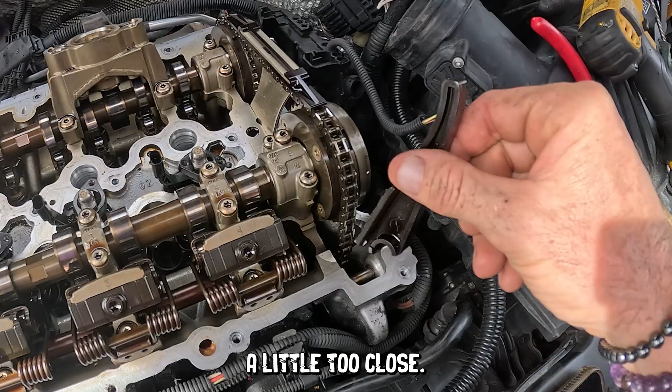We are back on the Mini. The Mini had so many problems, so many oil leaks. We did the valve cover. It had pushed out too much oil out of the other seals and they just kept leaking. So the best thing to do at this point is to pull the engine out, fix everything right, get it in there, get it ready for another 60,000 miles, because that's about what this has on it.

Then we're just gonna scoot the motor out, take it all apart, put all the new seals on it, put it back in, get it down the road. Stick around, let's get on it.

Oh yeah, Rev's here.

All right, first thing is take the headlights out, pop those guys out. Then we'll be taking off some of the fender liner stuff, bolts like that. I think those little clips just pop right off. There's some bolts underneath, and this whole front end with the radiator, everything else pops right off. So in the meantime, we're gonna be draining the coolant, stuff like that.

The AC, we're gonna hang the condenser and stuff maybe off the side so we don't have to disconnect that. I think we can scoot around it. I think I can push it out of the way and we should be good with that. But go ahead and we'll get into the time lapse and you'll see me yank this thing apart.

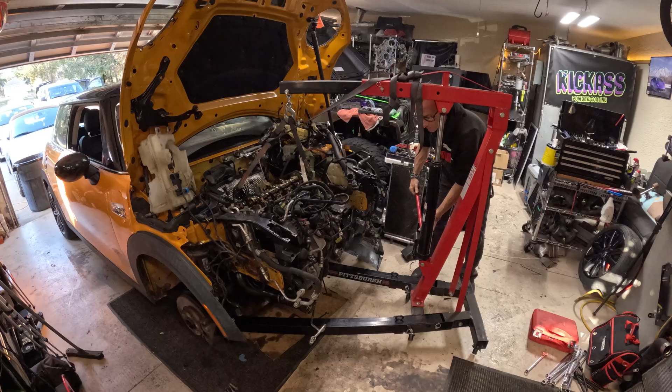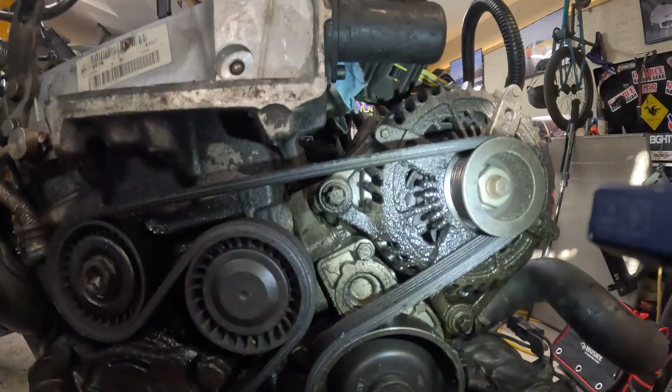All right, we've got the engine out and 64,500 something miles. Remember that. Look at all of this oil. It's supposed to be inside the engine. It's everywhere, but look at that. All over the drive belt, all over the alternator. Look at that. I mean, it's everywhere. Puddled up everywhere. Every seal is leaking.

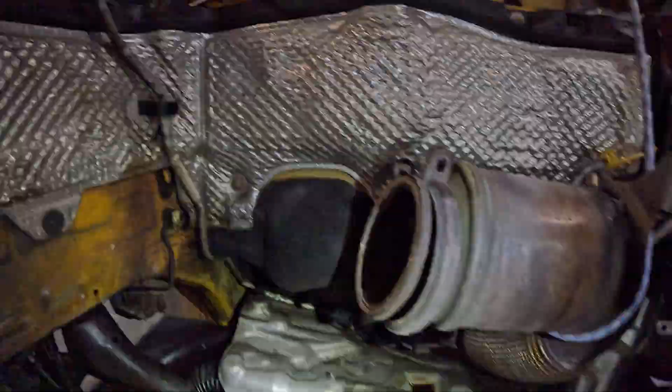That's what these things do. They just blow out every seal. Look at that. Look at all that. I mean, it was puddling up on top of the transmission. Look at that. We're gonna start yanking this thing apart, get it all cleaned up so it looks like a brand new motor when it goes back in.

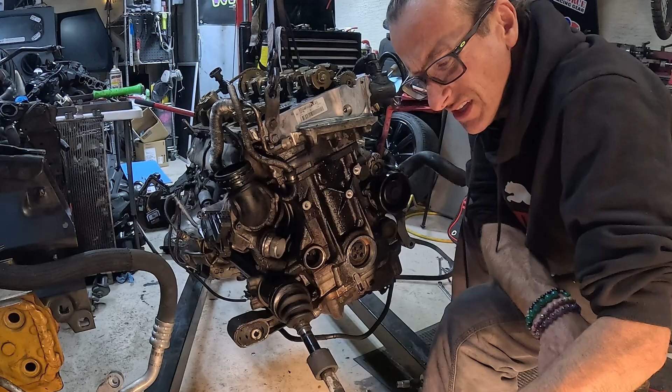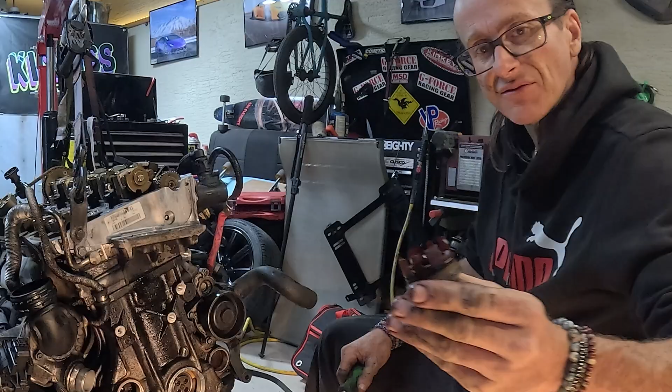Aw, I smudged it. Check these things out. It's got little, I don't know what they are. I know it's for the balancer shaft, so I guess they're access holes for the balancer shaft. It's not even an O-ring anymore. It's plastic, petrified. Like I can't even move it. It's so hard. That's not stopping any oil. Geez, what is this? What the hell is that? BMW. Holy sh! I just can't. The amount of oil, it's ridiculous.

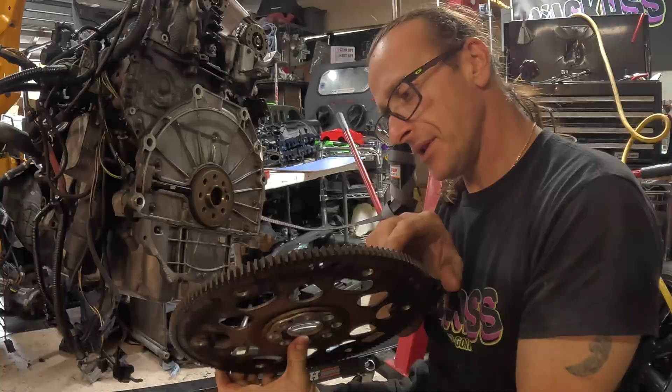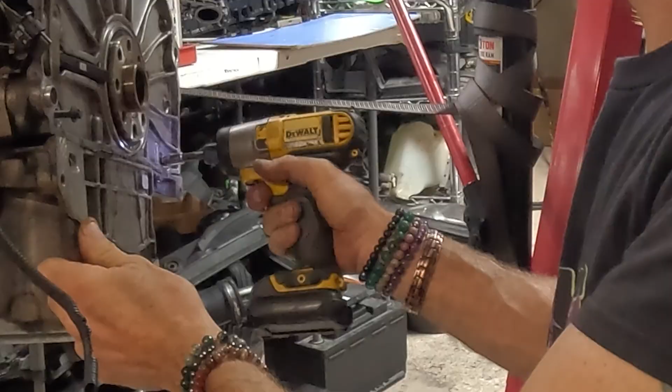Alright, pulling the flywheel off here. Here we go. Hemorrhaging oil. Imagine that. Oh, look at this. Yep, it's all over that thing. You can see where it's slinging all around here. We're going to reseal this oil pan too. We got to pull this cover off because we got to put that other guide in there. Let's get this oil pan off. Oh, alright. What the fuck? Not cooperating.

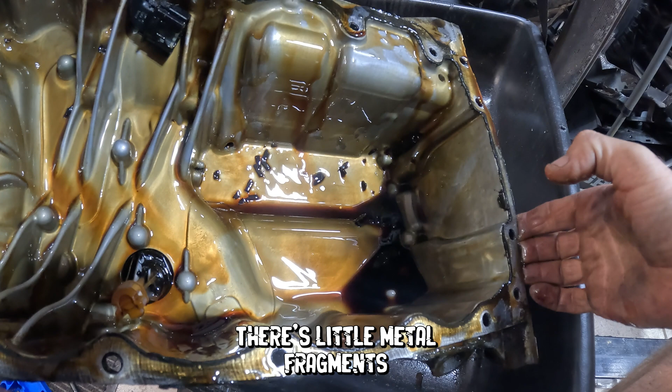Alright, so got the oil pan off. As we can see, there is a bunch of metal pieces, which is kind of sketching me out. It's like I'm panning for gold. Yeah. There's little metal fragments in the bottom. I don't know what that's from. That's not good. We've got some glitter. Forbidden glitter. Those are big ass chunks of metal.

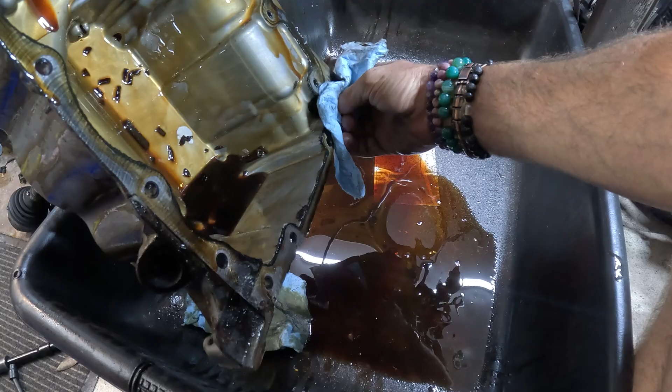Look at all that freaking guide. That thing's just, it shredded it up. You don't want that in your motor. You don't want the forbidden glitter in your motor. It's not fun. It's no good. So we're gonna get all those things. We're gonna put them on a paper towel here, and we'll show you what we find in there.

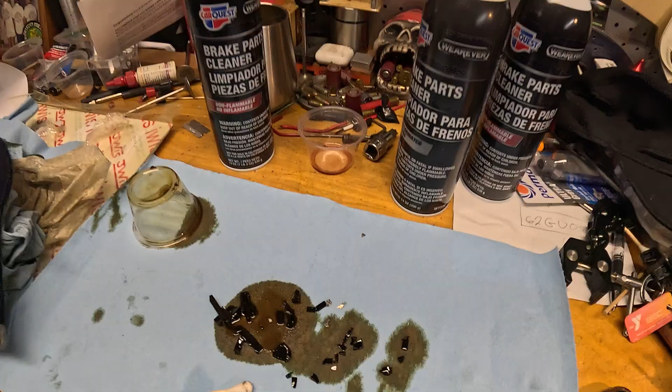And doesn't look that great. We've got a bunch of metal. It's so thin. It looks like bearing material. Oh, you know what that is? No, that definitely looks like it's thin bearing. Not good. Not good. You don't want to find that in your oil pan. Let's see if I can figure out where that's coming from. That's kind of a big deal. I'm gonna go ahead and take this side cover off here that we need to get into the good old chain cover here.

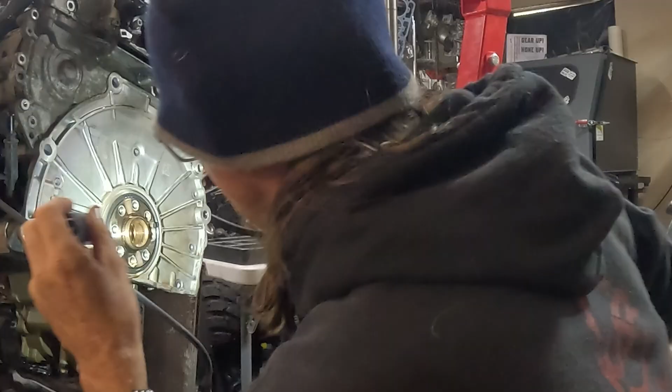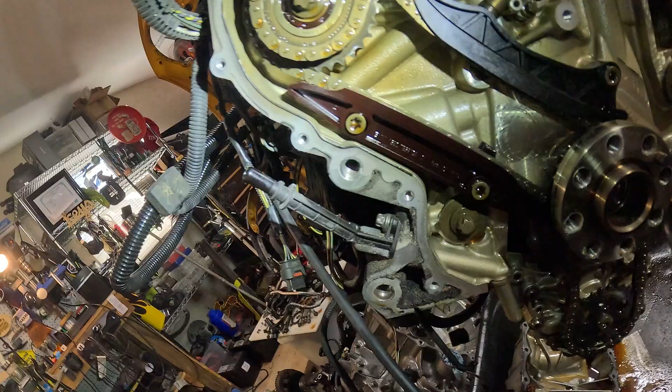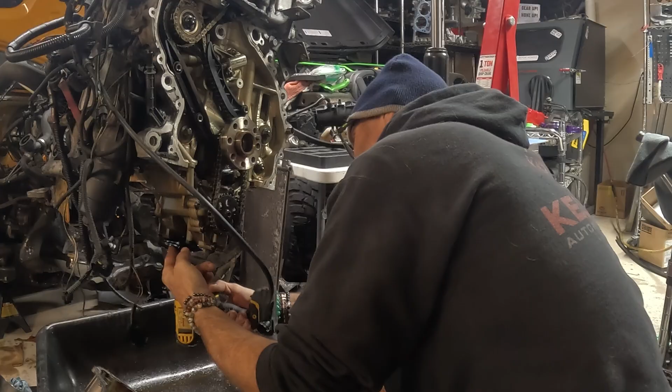Ooh. Oh, look, you can see that one's coming apart right there, too. Well, more parts. What's the name of this game? Order parts, put it together, order more parts, and then more parts. Alright, we're gonna pull this pickup off, remove it. Oh yeah, let's go dump it out over here. That is definitely bearing material. There's tons in it. I'm not putting this back on the car.

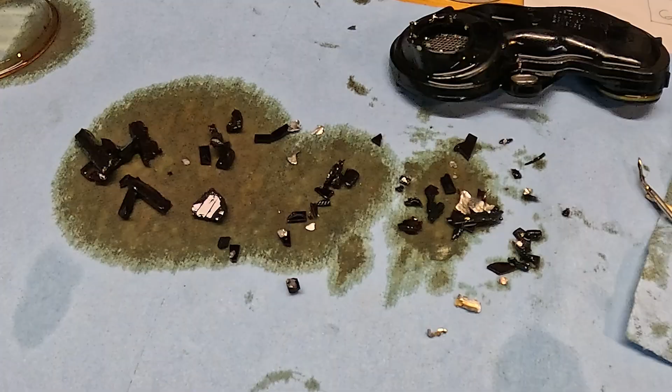That's lovely. We got into this Mini and we found that the rod bearings were done. I found a bunch of chain guide and metal in the oil pan. So pulled the rod bearing and the motor's done. So luckily this lady has an aftermarket extended warranty, which I can honor. So we've got another motor coming.

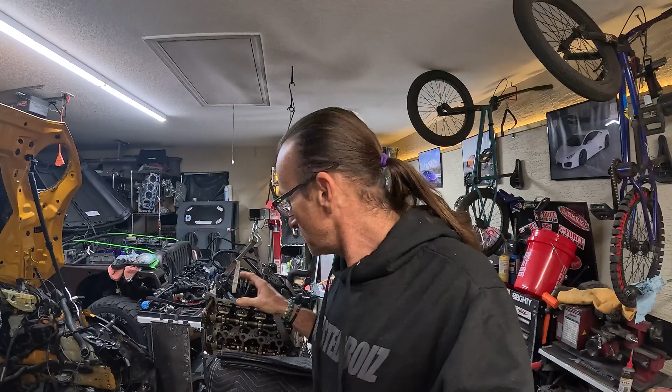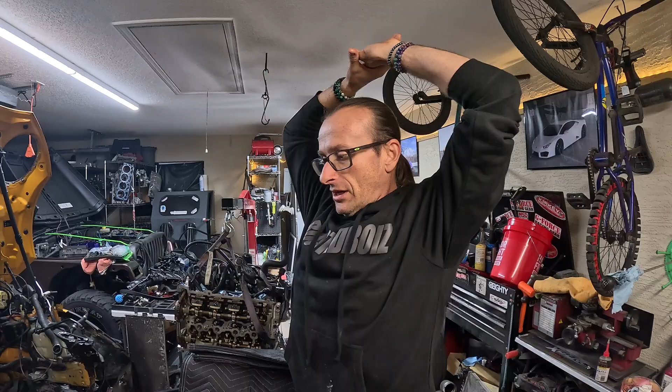These motors are pretty pricey. I think it was like $3,200 for this damn engine. What was it? $3,223. Yeah, not cheap. We got a lower mileage one coming from the junkyard. Should be here in the next day or two. This is the day after Christmas, so I'm sure all the logistics is a nightmare.

So I'm gonna get this cleaned up, get it ready for that other engine when it gets here, so this can be out of the way and I can just put that engine in, rock and roll and slam it in there. We gotta see what it comes with, what we need to swap over from this motor. Because with some junkyards you get all of it, like the wire harness, the computer. Sometimes you just get a bare block with nothing on it and you gotta swap everything over. So hopefully for $3,200 they give me everything. I've never used this company before for engines, so we'll see.

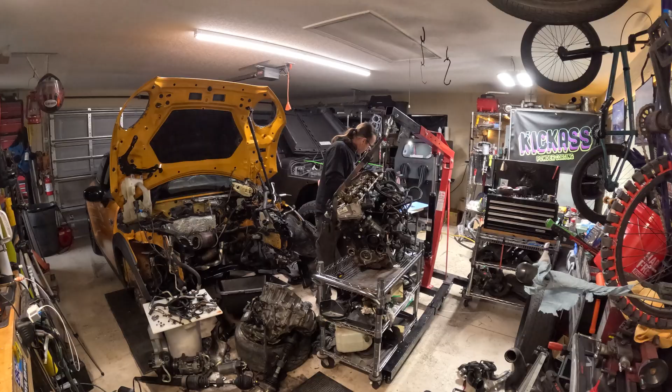But for now, I'm gonna get this oil pan back on here, just snugged up so I can set it on the ground and get it out of my way. I'm gonna start cleaning some of the engine bay in here. It's really nasty. Just oil everywhere. So I'm gonna try to clean all that up while I have this out and I have some dead time waiting on the engine. The motor is getting dropped off today. Should be here shortly. Jax is out there making sure that the guy parks it in the right spot.

What's up? Not often someone greets me with their own pallet jack. It has arrived.

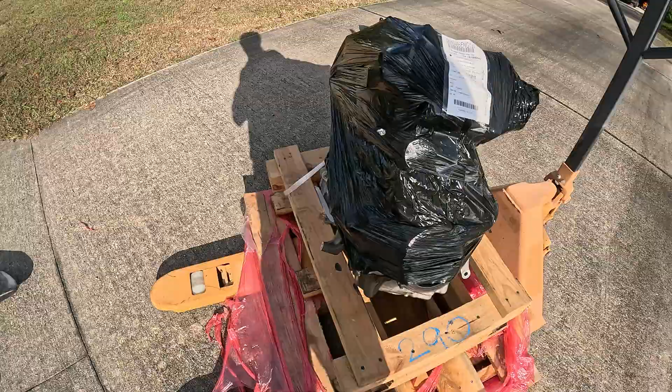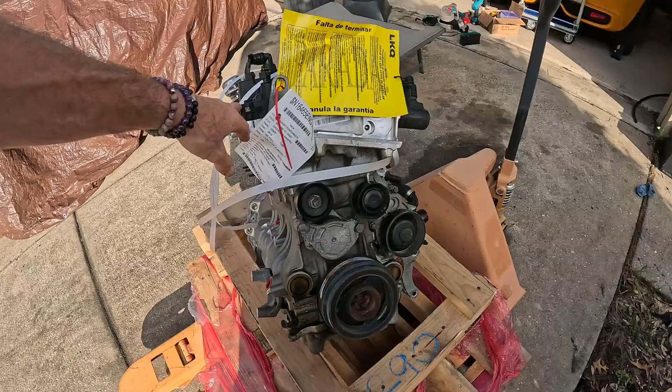Alright, so it's arrived. Do not remove this tag. Remove this tag. Alright. Pretty good. We're in one piece here. Good thing I have these because we're just going to put the new ones on because those are already leaking. Crank seal's leaking, so we'll put that crank seal that we have on there. Good thing I kept a bunch of seals. Good the injectors are still in there, so I don't have to mess with those. And I have to suck all this water out, so obviously it looks like it was outside.

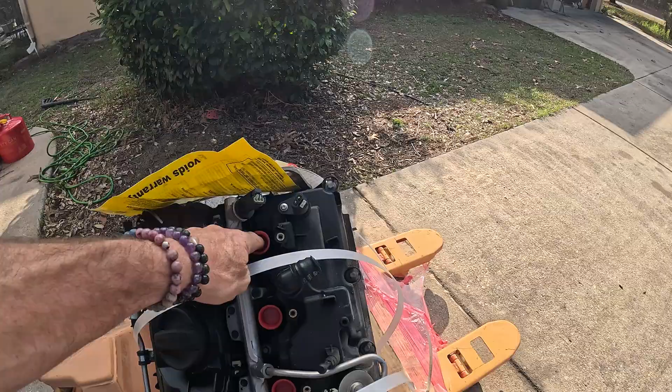So even though it comes from a junkyard and has these plugs, you still want to check everything over really good. We're going to drain the oil, check what's in the oil pan, make sure it's clean, go through all that stuff. Do that real quick. We got our motor. Yay! We can get this car out of the garage. Right now we're going to hit it with some, you know what we're going to hit it with. Spray now.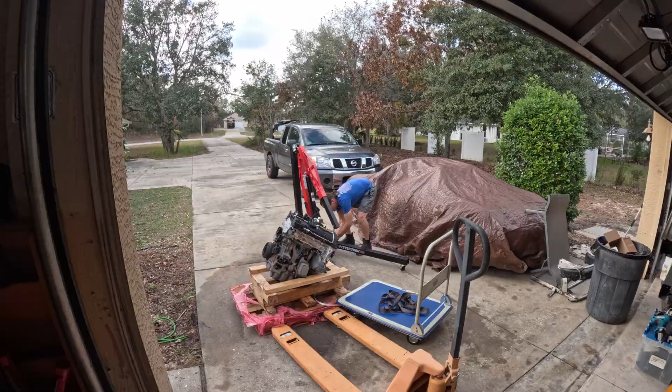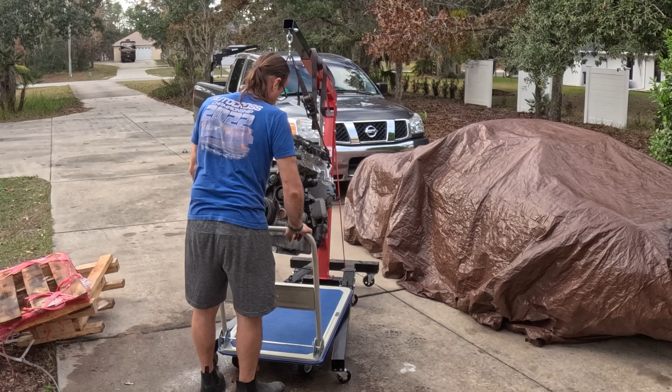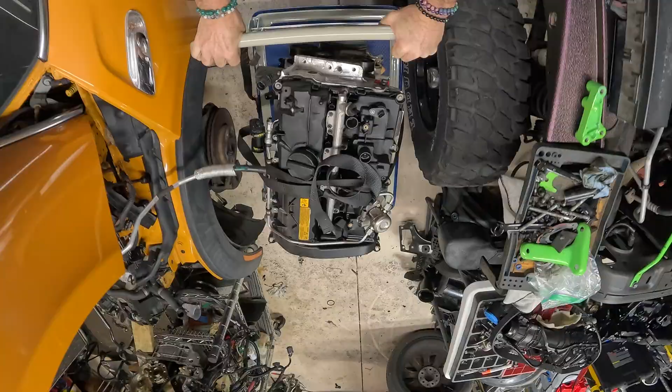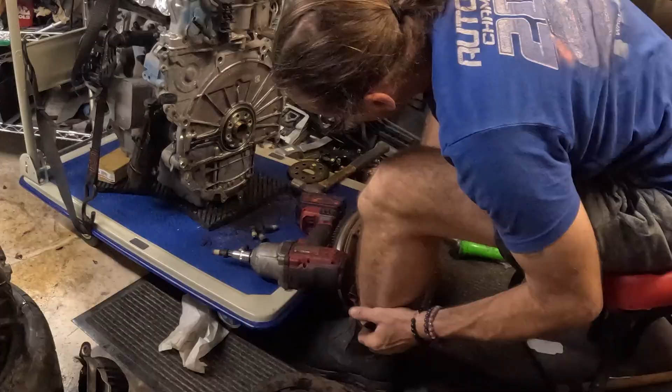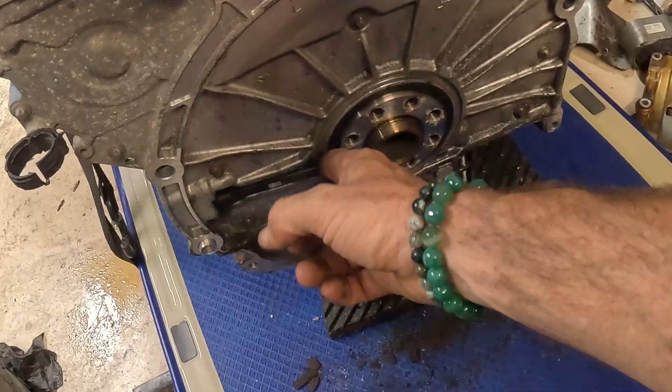So this motor we got came out of a manual, so I had to take the flywheel, pressure plate, clutch, all that jive off. So now we're down to the rear main. It's leaking. Good thing I ordered one. So we're gonna replace this while we have it out here. I suggest if you ever do engines or you get them from the junkyard, just go ahead and replace all the seals. Save yourself some time. If you weigh out the amount of labor to go back and do the seals, it doesn't make any sense not to do them. So we're doing a brand new rear main seal right here.

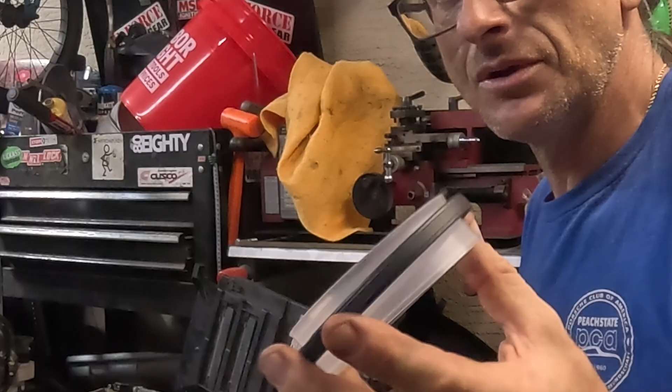Then we're gonna do a brand new crank seal and those two plastic plugs on the outside. We're gonna do those, and I'm gonna do a new valve cover. Then I got gaskets for the oil cooler housing, so all these O-rings on this engine will be brand new. Look at that new rear main seal. Ooh. Pop this son of a gun in after.

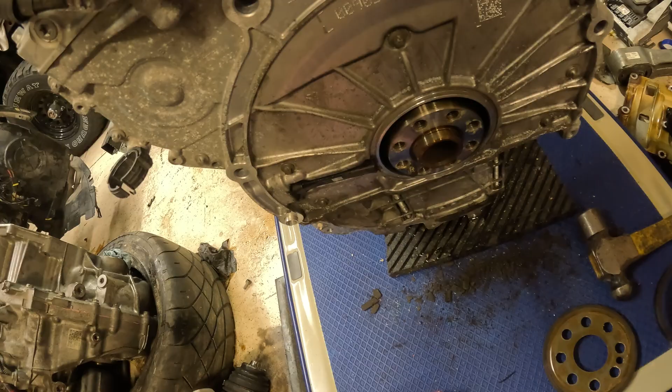You always want to pry away like this from the surface here. What I mean is you don't want to pry from the top of the block that way, because if you scratch the crank, you're in bad trouble. You pry off the crank towards the block, or you can stick a screw in this. Some people put a screw in the seal and then pry the screw out, which works really well.

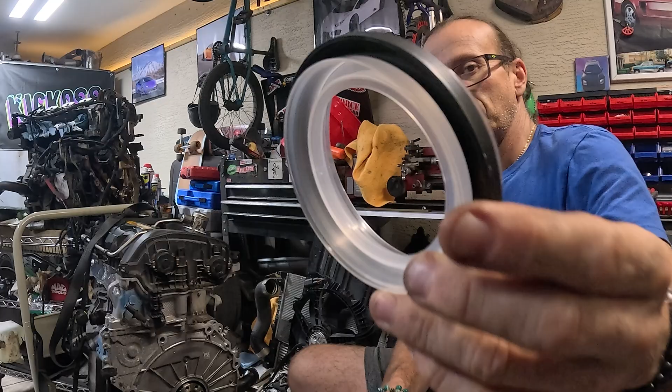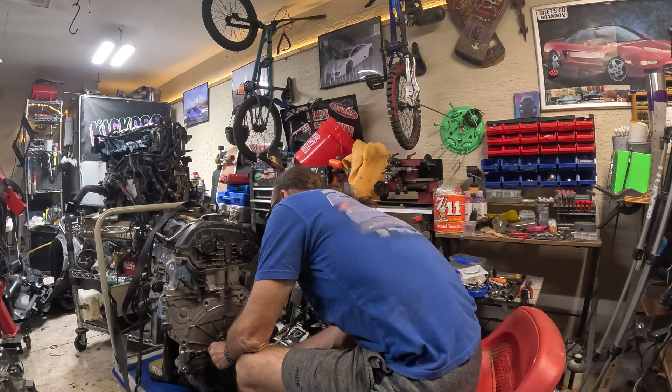So a lot of European manufacturers, a lot of seal manufacturers come with this little tool. Pretty much just stick it onto the crankshaft and slide the new seal on there. Oopsie, does not fit like it's supposed to. Very nice, very nice.

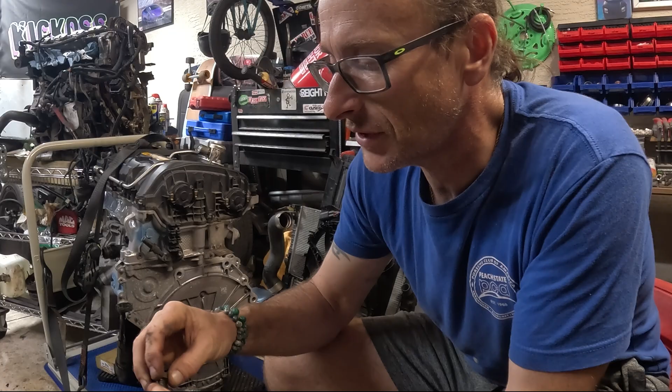Brand new seal installed. It's always a good idea when you have flywheels and all these ones that have all the Loctite, you want to get a die and get it tapped, and tap all that junk out of there so you can put fresh new Loctite in there. Do that with all your holes. Come out in the garage late at night, clean a couple holes, tap that crank. A little oil in there. Oh, son of a biscuit.

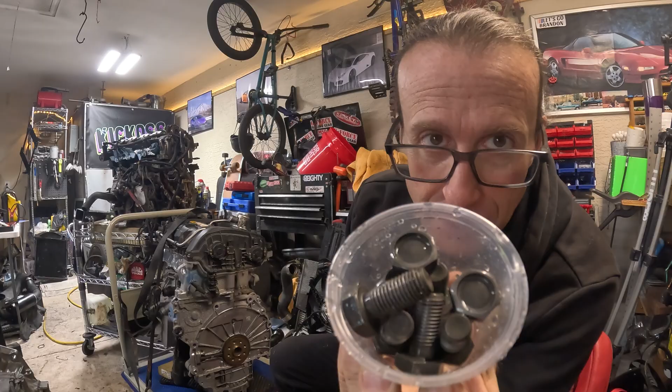All right, it's the next morning. I ran a die around these, and there's still a bunch of Loctite in there. Since I have the vapor hone now, we're gonna do a quick little vapor hone. Get these things cleaned up real quick. If you have little plastic containers like this, I literally hold it in there, stick my nozzle in there, shake it around, and do this kind of deal. And it gets them really good. They're not perfect, but they're way better than they were, and I'm happy. I got clean bolts to Loctite this flywheel on.

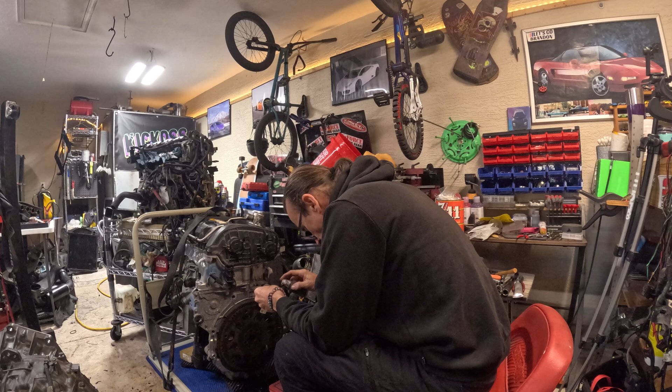We're gonna get into slapping this guy back together. So come along, it's gonna be a little time lapse here. What I'm doing right now is I had just put the seal on last night, so I'm going to put the flywheel on, Loctite those bolts, slap it on. I may slow down and go through those. So occasionally I need torque specs, and I run inside to the computer.

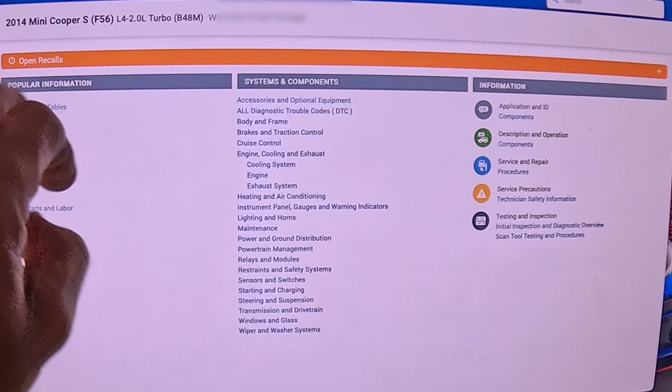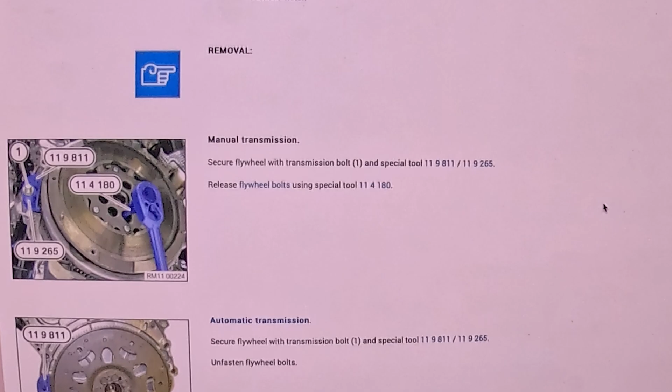Okay, we are here at the computer. You put your VIN number in, and I highly recommend if you're doing any kind of engine work that you don't just Google it. ALLDATA Repair, you get a subscription to this, and it has just about every car. I need torque specification. I'll tell you the thread pitch, the bolt. So it's a 12 by 1.25. And you can go in here, it'll give you step by step on what to do, like how to remove it, all that fun stuff. Then down here we've got our torque specs. 120 Newton meters. You got your labor times too.

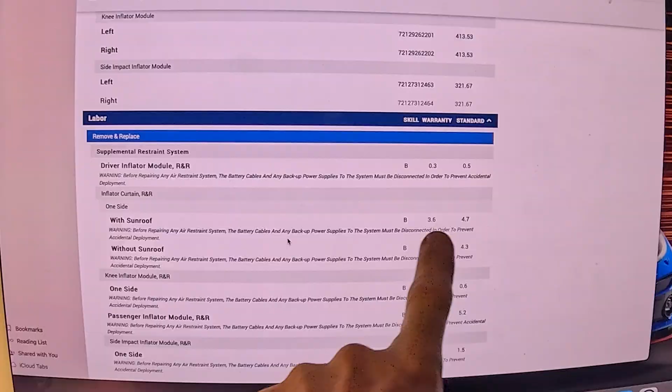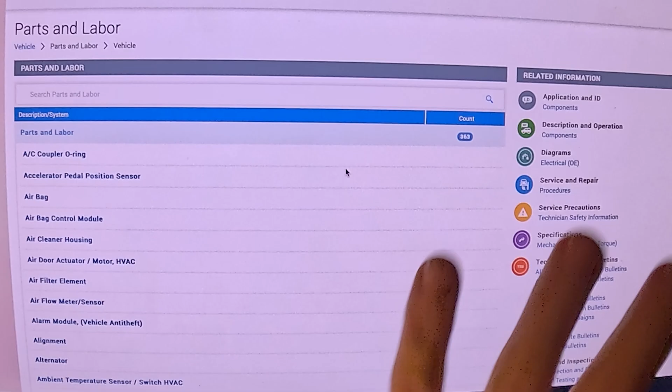So for instance, an airbag on this car tells you how much the airbag is, tells you labor times. They've got procedures, everything you could think of. Look at this, great pictures. They pretty much take the OEM manual and put it into a digital thing. That's what ALLDATA is. It's not that hard to do, but I still need to get better at navigating it. I usually use it for the electrical stuff and torque specs and labor times for quoting out people's stuff.

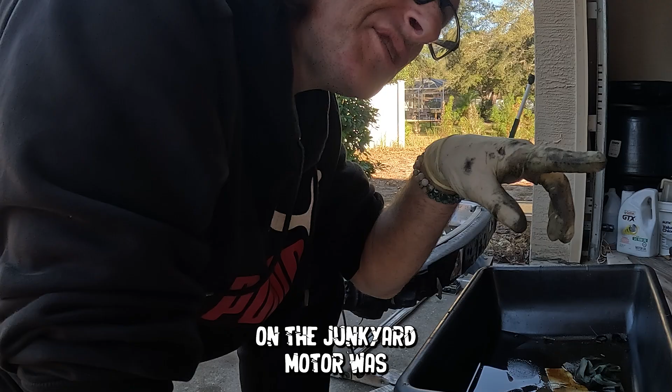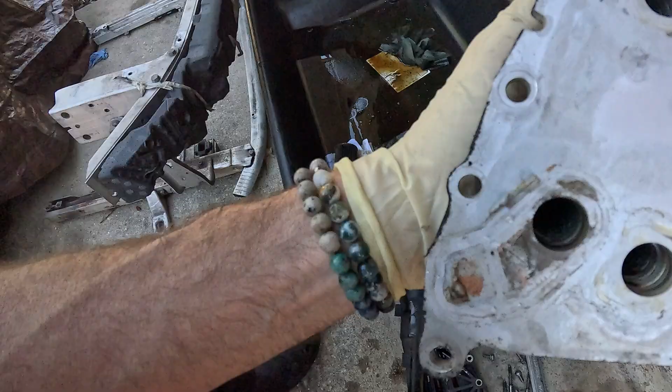The oil cooler that came on the junkyard motor was cracked, so I'm going to take the one off the old motor, clean it up. I'm going to take it totally apart because there was metal in this thing, so we got to make sure there's zero metal. And then she put stop leak crap in here at one point, so we're going to get rid of that. Oh, gasket guy worked on this thing. Look at that. Gasket guy was here. That son of a bitch. If you guys seen gasket guy, keep an eye out. But he got after this one.

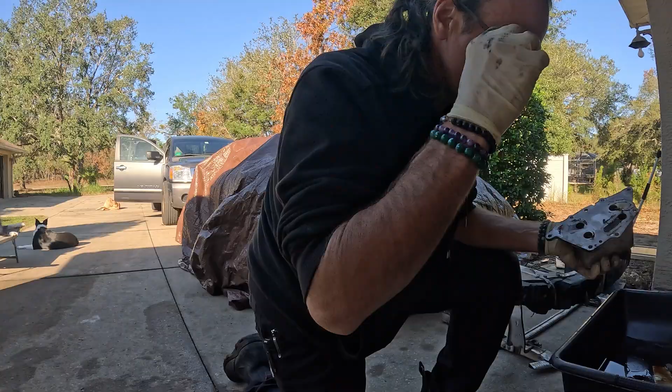There's gasket stuff everywhere. There should be brand new O-rings on there. So we're gonna take all these off, clean this thing, make sure there's no cracks, because these things crack all the time, and get all new O-rings. I thought I got a set, but it doesn't look like the ones I got, so I'm kind of pissed.

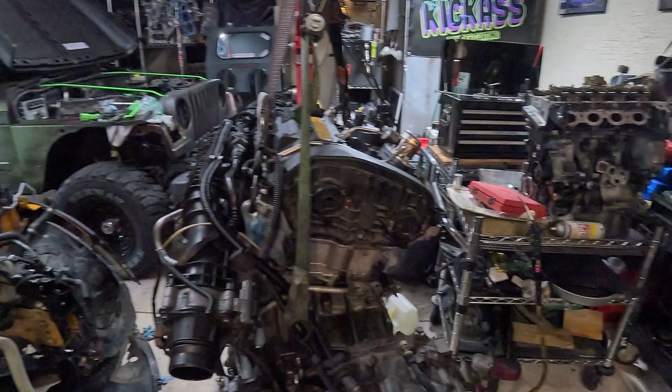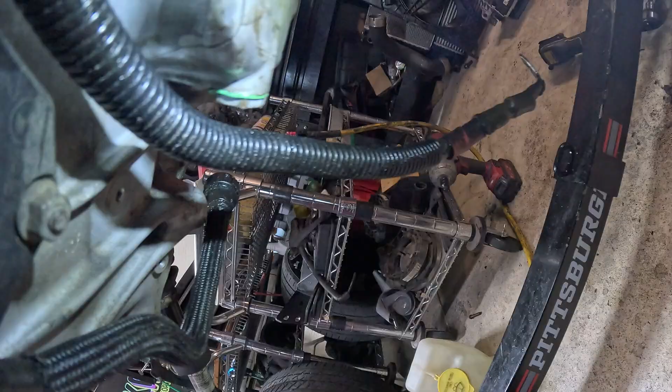So, we are all ready to go. And of course, I got everything together, and for some reason I didn't stare at the oil pan super hard. But now that I've been looking it over, it appears to have a gigantic crack. Looks like it's got JB Weld in it, maybe?

One of those things you get when you get junkyard motors. Looks like it got dragged on the ground and then dropped. That's usually dropped. I bet you they dropped it off the forklift at the freaking wrecking yard. So I'm gonna clean up this bottom. Then we have to yank the oil pan off that one.

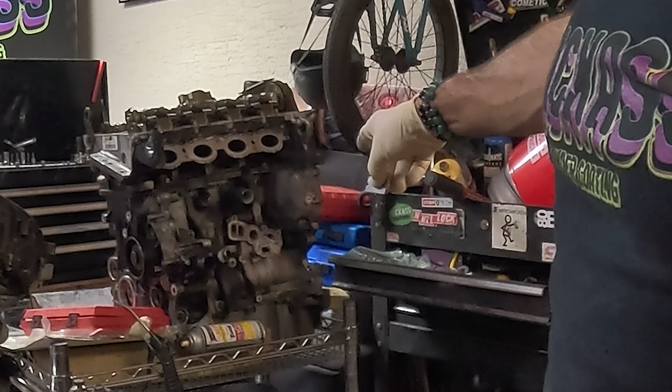Clean that oil pan up. Get it on here. Get it all on tonight so it can dry overnight and be good to go tomorrow. So I want it to dry all night, not just slap it on there. I really like to let that Ultra Grey dry. I've never had a leak, but you never know. Probably because I let it dry all the time.

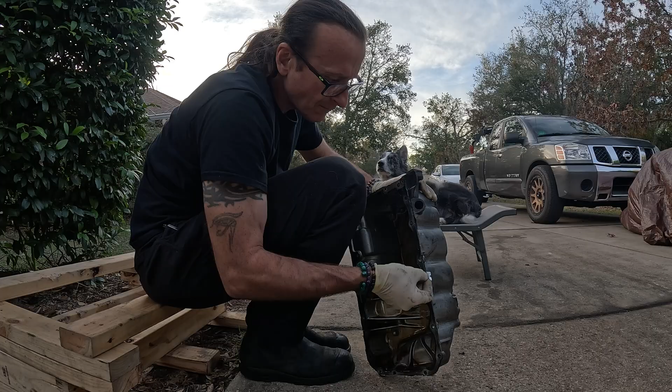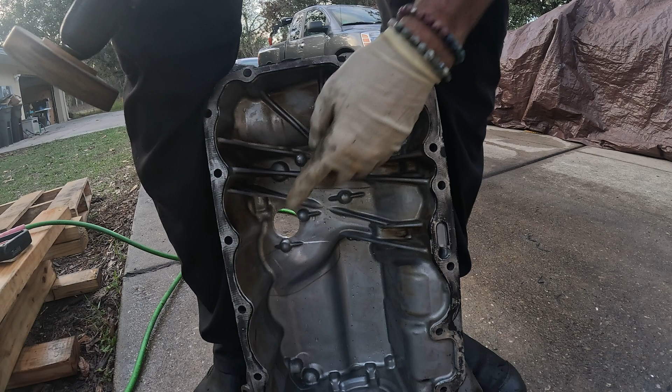Show you all my secret weapon against oil pan gasket gunk stuff. This is the hardest part to get your gasket stuff off, this little corner. But watch this. This thing just eats it up.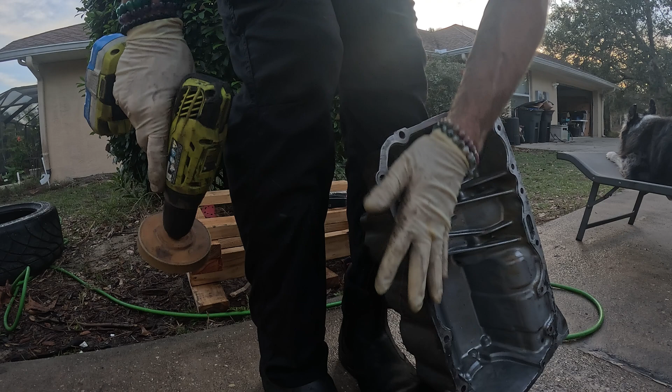There. Oh, I'm gonna fall down into the... I'm good. I'm good. My garage is a disaster.

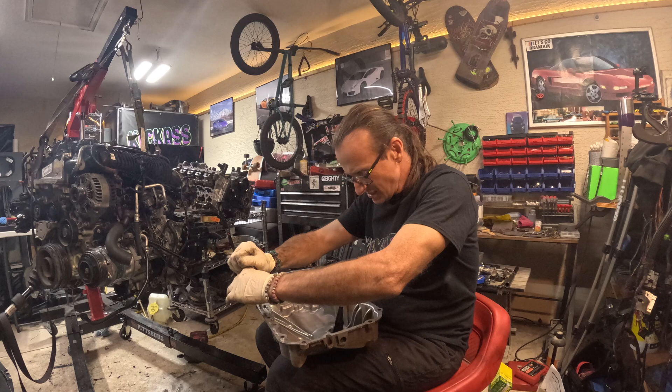All right, it's a little chilly this morning. Got the heater on. Dogs are all cuddled in the corner. We're gonna get this thing in here. I had to put the oil pan on last night. You'll see that because I found a huge crack. So we put that on. I let that dry overnight.

This will be fitting this thing in there. I think I got everything on there. We're gonna go back over everything. We're gonna put fluids in it, get all these parts back on, get this front end back on, and get this thing down the road. So let's get into the time lapsing.

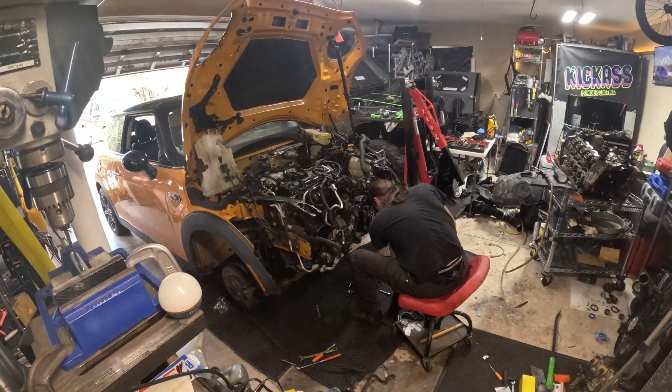You get lost in the things you want, but if you slow down for just 1 second, you might feel way better than you thought. And if you took a second to breathe, took a minute to cry, well maybe you would see that all this time I've been right here. Maybe I know it, life can get hard, keep going. I just wanna be the one you need right now. Baby, would you turn and look at me right now?

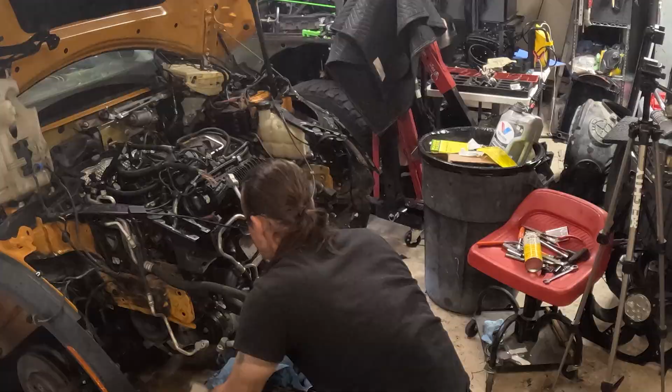It's another cold morning here with the Mini. We got it pretty much in there. He's in there going over all the final things. I do need to put a thermostat, so I gotta go to the store and get a thermostat. I forgot to order it for some silly reason.

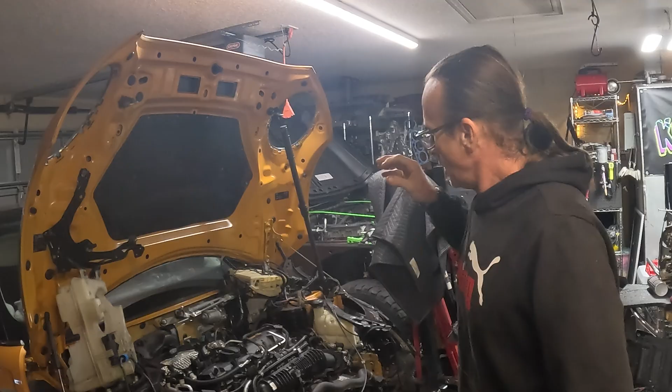That being said, I'm gonna put the rest of the bits on, try to get the rest of everything else on, except for the front part yet, because I gotta put the thermostat in right there and the drive belt. So those two things, I gotta go run and get them, but for now I'm gonna try to get all this other stuff back, battery box, all that stuff organized back. So that's what we're gonna do right now. Kind of warm up with this, because it's cold.

Dogs are all cuddled up in here. There's Rev. Say hi, Rev. He's like, hi, Rev.

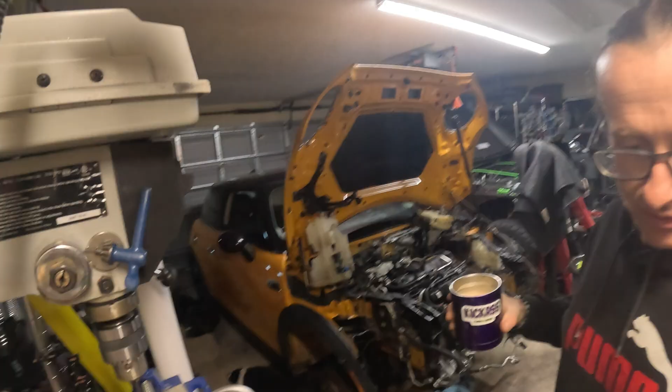Oh yeah, baby, I know it. Life can get hard, keep going. I just wanna be the one you need right now. Baby, would you turn and look at me right now?

All right, we gotta go run out and get the thermostat. Yeah, anytime you do a junkyard motor or any of that, you always want to put a new thermostat. You should always put one in it. That's just the best idea. Because this little bit of money can protect your entire engine. Got a little Motorcraft. So let's get this sucker on there. Get this drive belt buttoned up here.

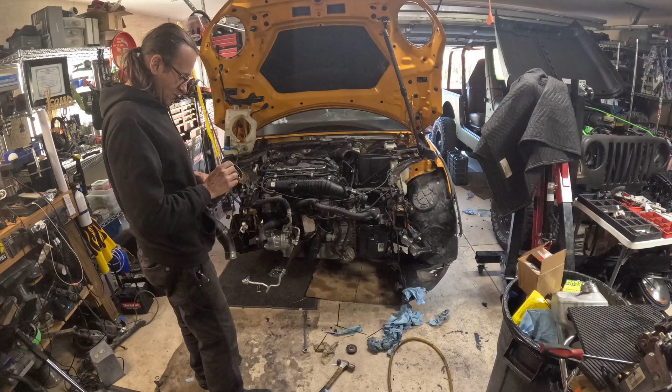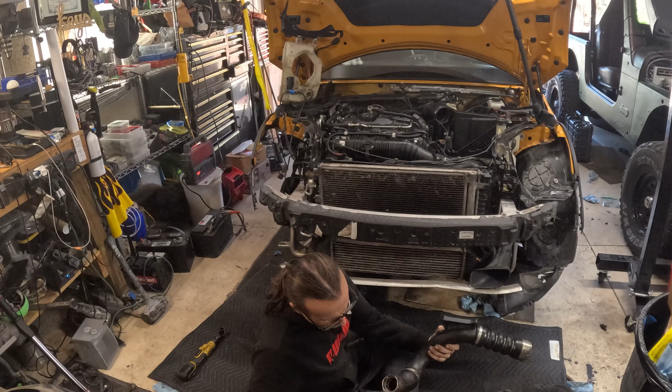All right, so we got that motor in and it ended up having super low compression, like 60 PSI. Put oil in, cleaned the valve, checked everything, did 100 different things to try to get it to start. So there's something going on inside the motor or something's out of whack. I contacted that company. They're sending me another motor out. That'll be our next episode next week, so stay tuned. That'll be part 3 of the mini series.